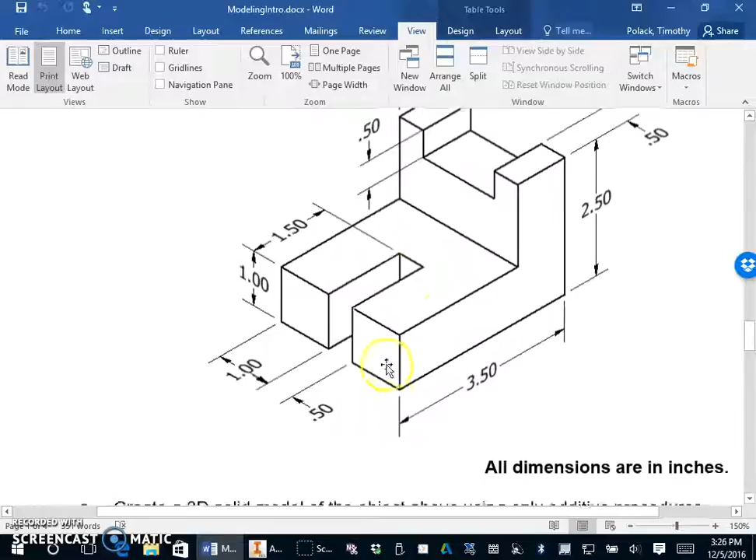Okay, so next thing we're going to do is model this guy again, and this time we're only going to use subtractive procedures. So this one will actually turn out a lot faster than the other way that we did this.

So if you think about how we could do this subtractively, basically let's sketch from this side view this L shape, and we're going to extrude that the entirety of this direction. So 0.5 plus 1.5 plus 0.5 is a total distance of 2.5. So we're going to extrude this 2.5 in that direction.

Then we'll go in, add a tiny little rectangle here and cut that out, and add another rectangle up here and cut that back. Alright, so it's not going to be too bad.

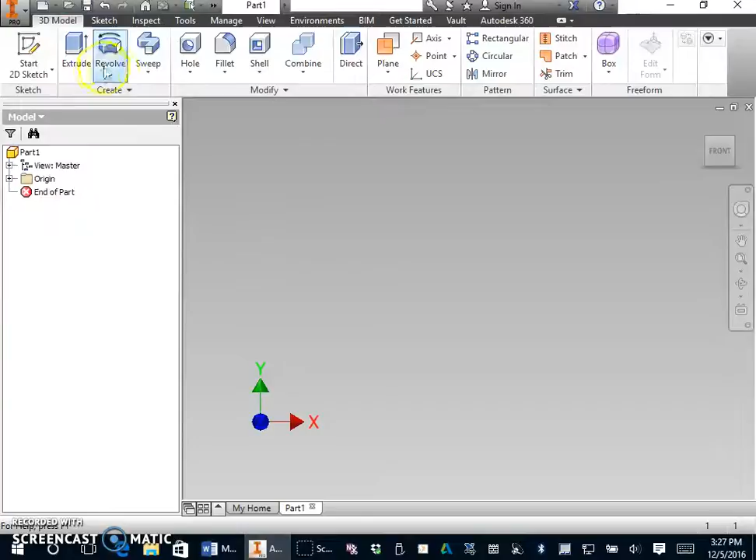I've started a new part in Inventor, start a 2D sketch. I'll start in the XY plane, and let's make this L shape. So, grab my line tool.

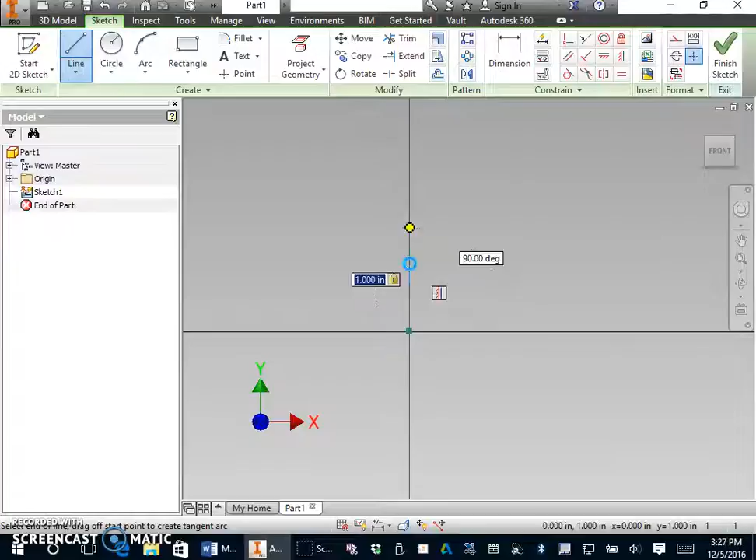I'm going to start right here at the origin. We are going to come up, this is a distance of 1. Then I'm going to come across a distance of 2.5, if my math is right. And then I'm going to come up a distance of... 2.5 minus 1 would be 1.5.

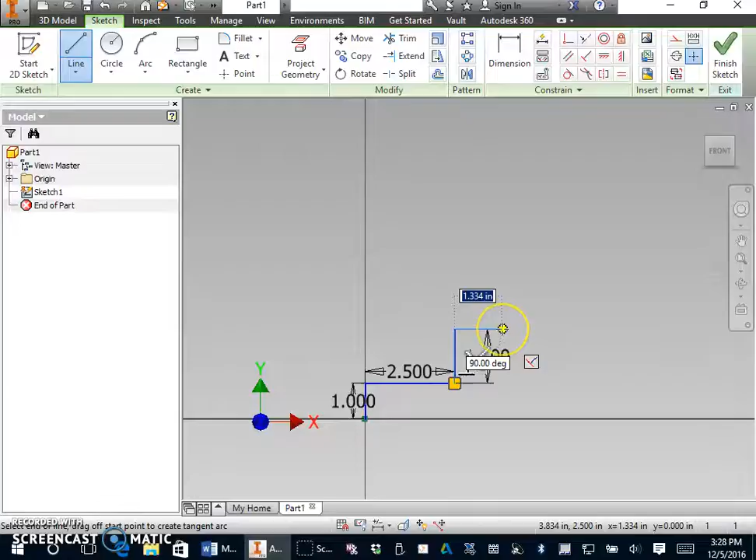Then come over, this is 1. Then this is going to come down a total distance of 2.5, which I shouldn't even have to do because it'll just snap right into my x-axis and I can see 2.5. Awesome, so my math is right. And then I'll come all the way back over here and connect this up. Finish sketch.

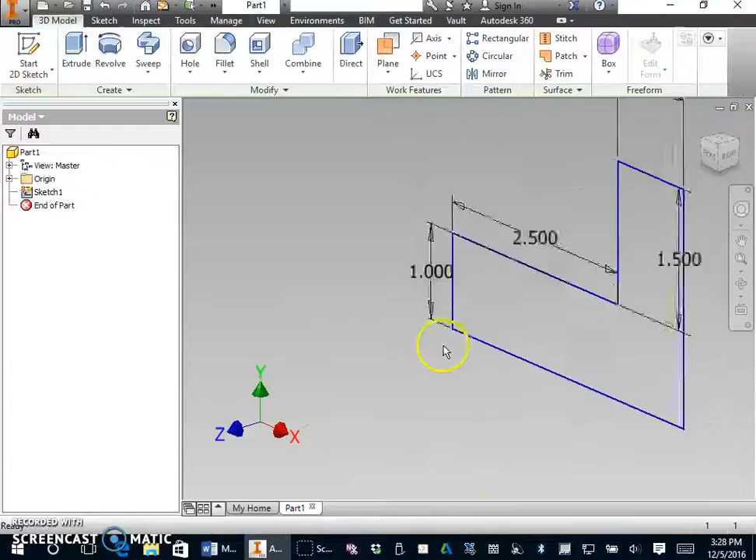I'm going to extrude that to a length of, again, this is my 1.5 plus 0.5 plus 0.5, which is 2.5. If I go back to this, here we go. Extrude that to 2.5. Boom.

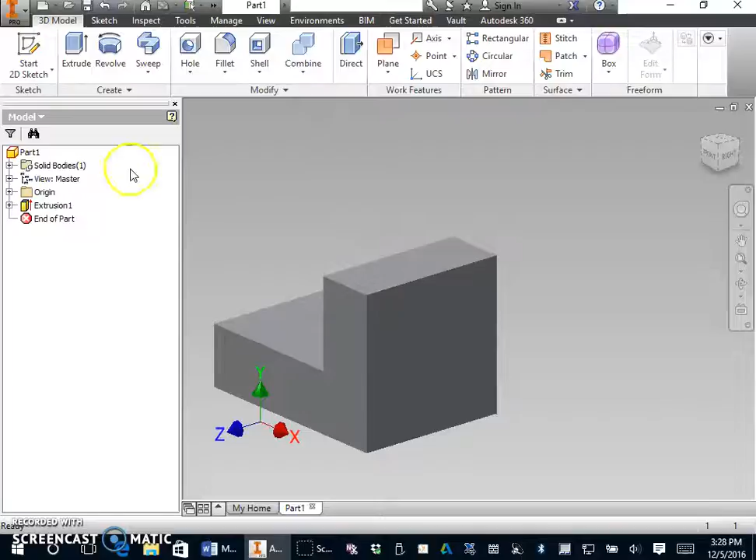So from this point of view, that looks very much similar to what I need. The only thing is I need to cut this piece out, I need to cut this piece out. So I'm going to cut this piece out first.

Now there's two different places that I could do this. I could either sketch a rectangle right on the front, or I could come into the top and sketch a rectangle on this surface and cut that down. It looks like I've got more, I'll do it on the front.

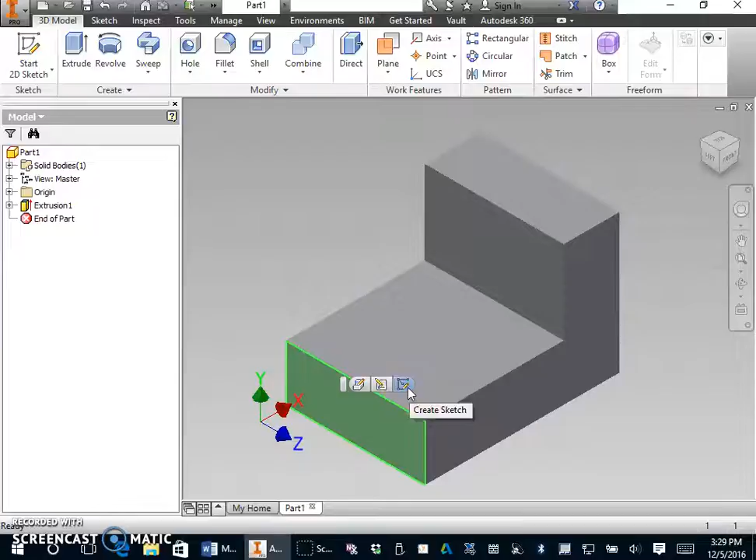So I'm going to click this guy, and I can click this icon to create a 2D sketch on him. I am going to change my view to shaded with edges because I want to be able to see that line. Alright, I'm going to grab a rectangle tool and sketch a rectangle right here.

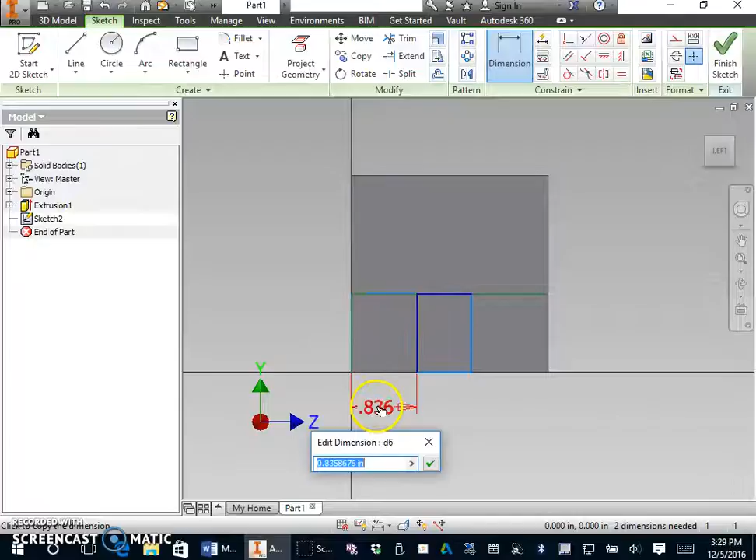Now I didn't worry about dimensioning that, so I'm going to grab my dimension tool at this point, and my paper tells me that the distance from that line to this edge is supposed to be 1, and then my paper also tells me that this gap is supposed to be 0.5. Awesome, so now it's dimensioned correctly.

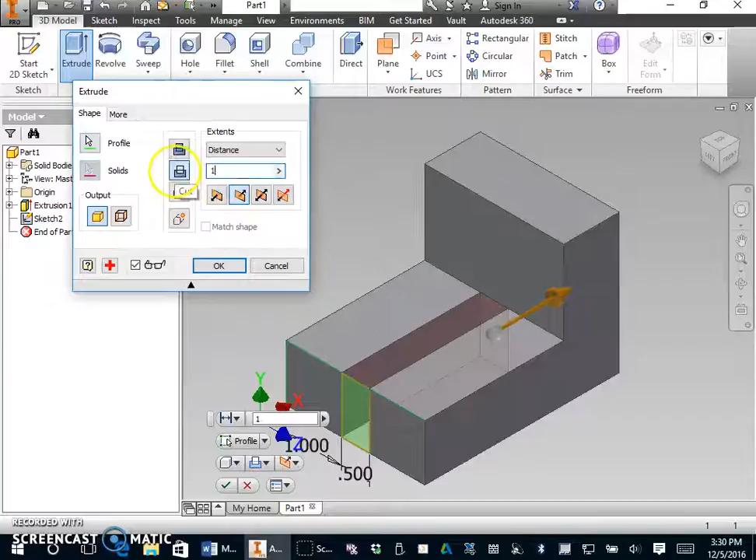Finish sketch and extrude it. And based on my paper, I'm going to be extruding this back 1.5. So right now it's adding. I'm going to cut back to a distance of 1.5. Boom. Alright, only one more thing to do.

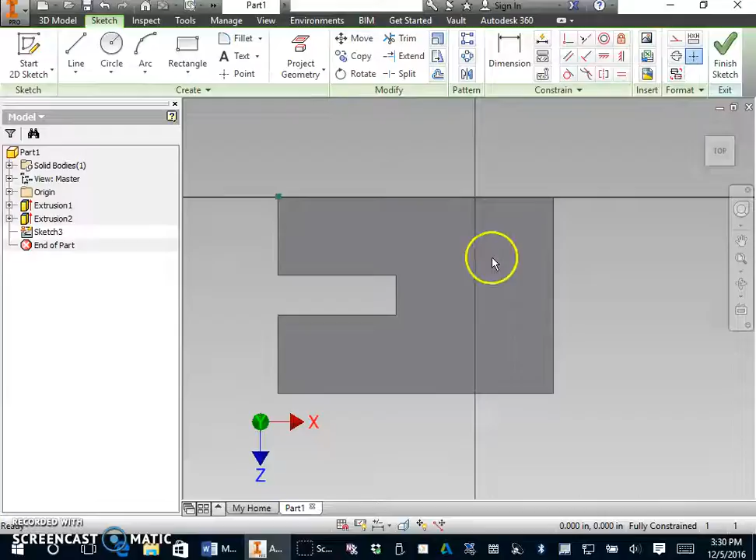So for this one, again, I could sketch a rectangle right on this front surface and cut that back, or I could sketch on the top surface and cut it down. You know what, this time I'll go ahead and sketch on the top surface. So, new sketch on that. It flipped it around, whatever, it doesn't really make a difference.

I guess I could orient it this way. Okay, rectangle is going to be 1.5 in length, and then also 0.5 from the reference edge. So, rectangle tool. Snap into that.

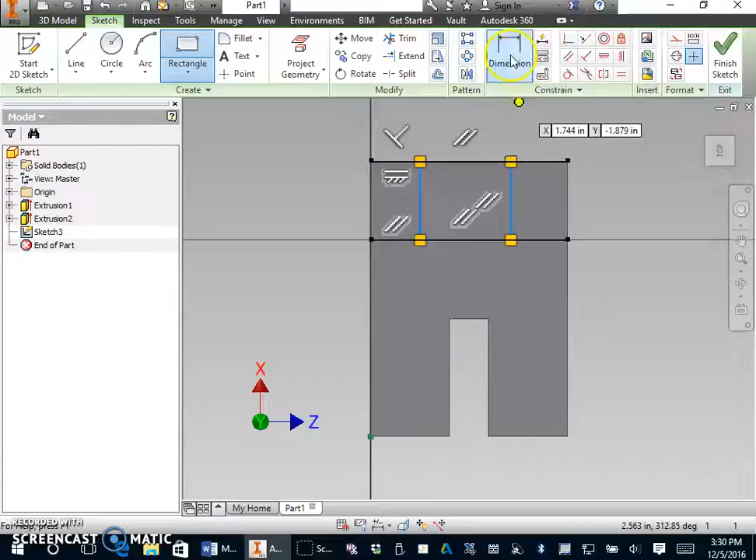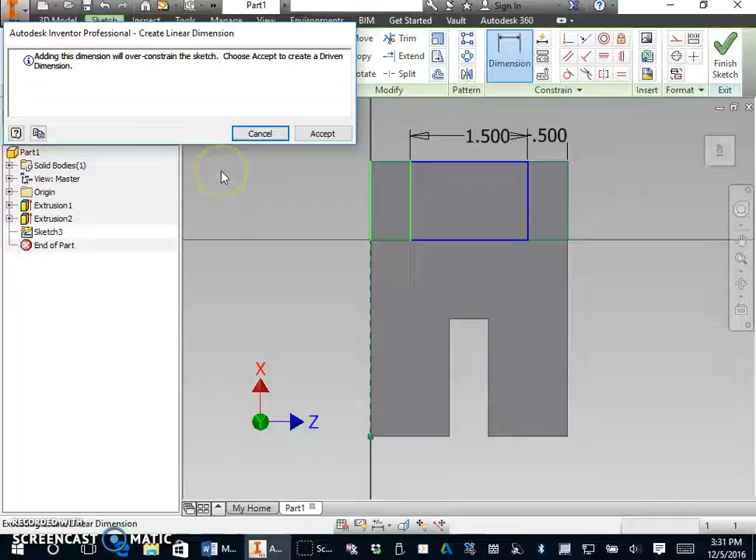Dimension: the distance between these two should be 1.5. And then the distance to one of the edges is supposed to be 0.5. And you don't have to do both edges because if you look at this distance, it's automatically 0.5 because of all the other constraints that we have there, and it's going to tell me that's an over-constrained sketch at this point because I didn't need to add that dimension.

So, finish sketch, and this time I'm going to extrude this guy. He's going to cut down, and I want him to go down 0.5. Alright, there he is.

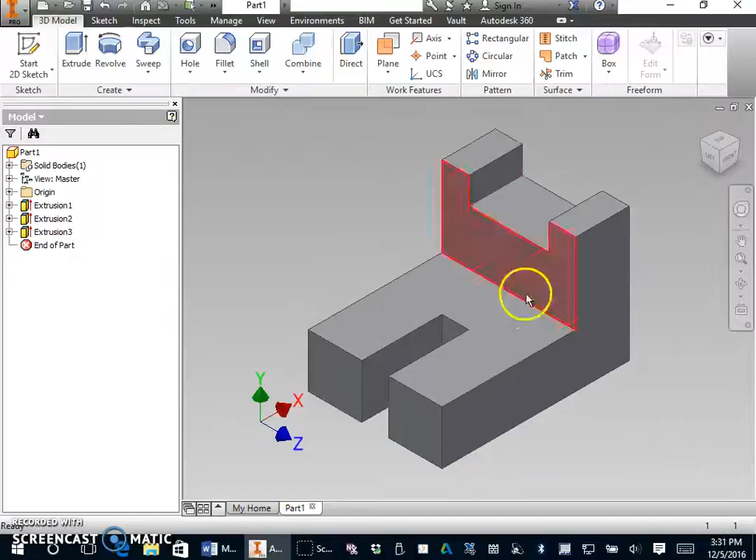So screenshot him, save the part file, put the screenshot in the part file in OneNote, and then move on to the next part.